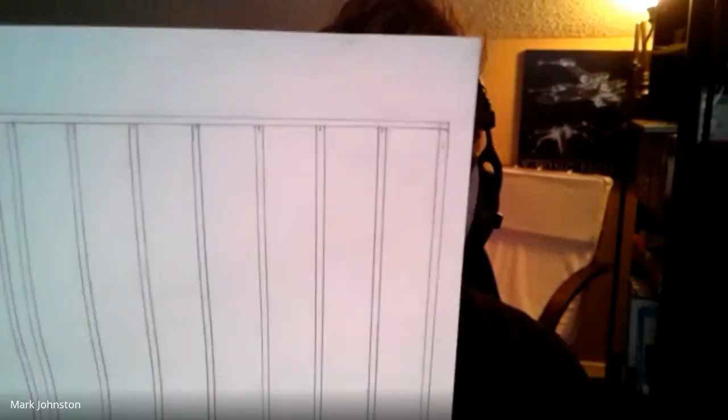We've drawn it to a 3/4 inch scale, meaning 3/4 of an inch equals 1 foot. The cool thing is 3/4 is also 12/16. Think about rulers having 16ths on them. Every 16th is 1 inch, so 12/16 is 1 foot. So 3/4 of an inch equals 1 foot in our scale. That's the scale we're using.

So we've done a wall, a regular wall with just a wall. Then we did a wall with a door in it, something we'll need in order to get into our shed.

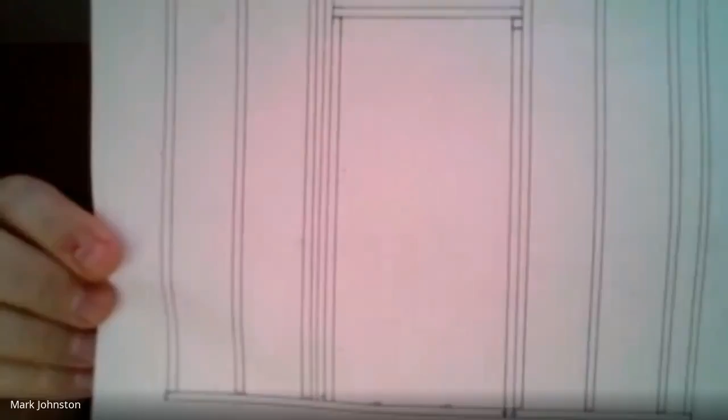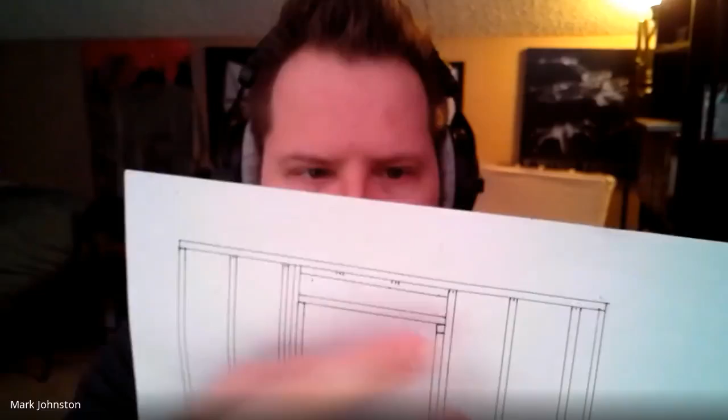We've learned some other definitions, like that's a header, and you've got trimmers right here. The way we did this one, we didn't end up getting any cripple studs up there, so we just used another 2x4 to fill that gap at the top. It really just depends upon how your shed is going to be built and how you've designed it. That determines things like the height of certain elements. I'm pretty sure door heights are standard, but you could have doors that are higher or lower depending on the materials you use.

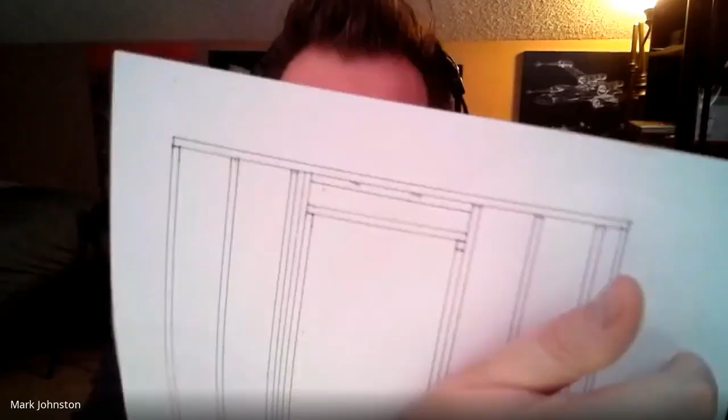So anyway, that was that. Notice that the studs on these are each 16 inches on center. That's a standard in construction, to put studs in a wall 16 inches apart, measured from the center of one to the center of the other. That's actually kind of cool, because 16/16 is 1 inch in our scale, so we just use the inch marker at each spot where the studs go.

And then we also wanted a window for our shed. So there we go — we have the header for the window, a sill for the window, and those trimmers. And then there's a cripple stud right there.

So I'm using these plans, and I did make a mistake early on when we started this, in the height of the wall. We're going to find out together as we go through this. This is probably going to be the first of 3 or 4 videos. We'll find out why that mistake was a big deal, how we'd deal with it if we were out on the construction site doing it this way, and how we might do it better in the future so you can avoid that kind of mistake too.

So I'm going to use an online tool called Tinkercad. You've probably heard of it before, especially if this is your second year with me — you've probably used Tinkercad last year. I'm going to show you what I've been working on on my own.

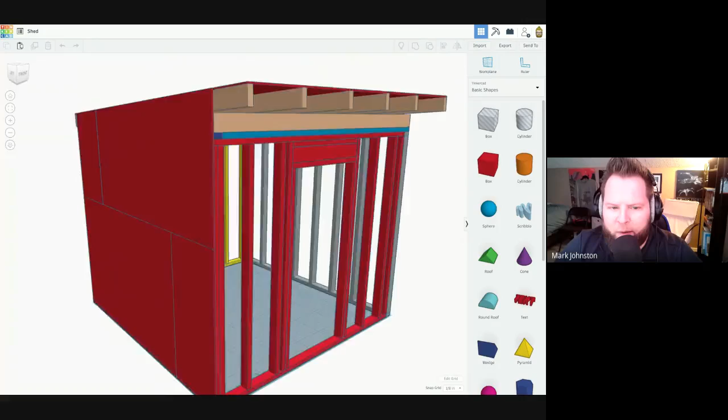I hope you guys can see that okay. But I basically put my shed together, and I even put a roof on it. I even started putting some decking and sheathing on it. But you can see there, this is completely to scale — it's exactly the size of the scale that we did in the drawing.

Watch, I'll select this sole plate right here, and I'll select this little dot here. Look at 7.5, which in our scale, 7.5 inches equals 10 feet.

A 10-foot 2x4 is a standard size of lumber you can buy. You could go to Home Depot or Lowe's right now and buy a 2x4 by 10 from them.

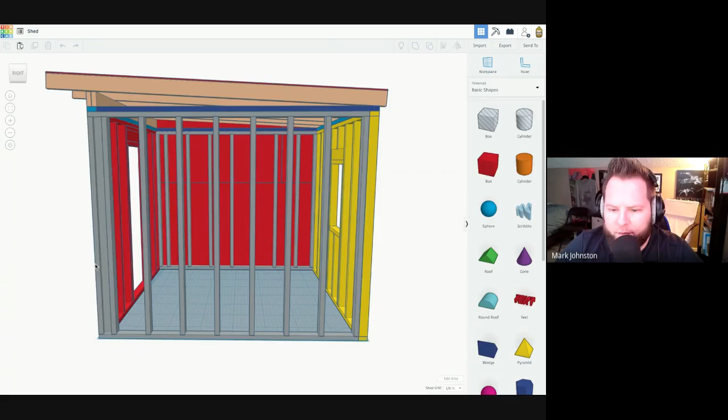It's important to mention that lumber mills cut a quarter inch off the nominal size. Theoretically, they cut the lumber to 2 inches by 4 inches as a rough cut, then they plane it, sand it, and cut off imperfections, taking a quarter inch off each side, which totals a half inch. So a 2 by 4 is not actually 2 inches by 4 inches—it's actually 1.5 by 3.5.

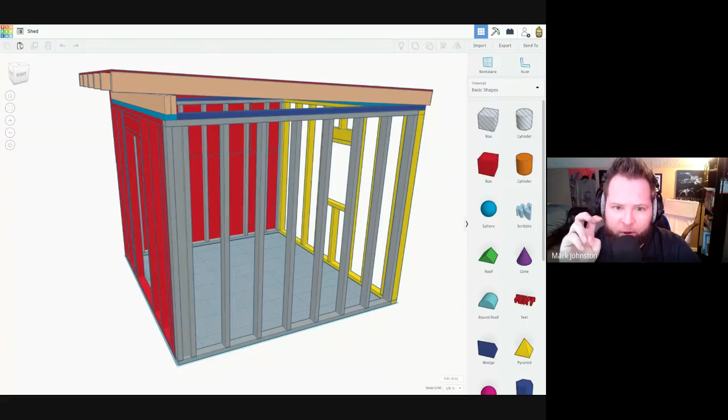That's a little weird, but it's just the way it is. For the purposes of measurement and putting it in the computer, we're going to use the nominal size of 2 inches by 4 inches. If somebody was curious about your project, you could tell them the teacher said we were going to use full-size lumber measurements. In some places in the country you might find a lumber retailer that could get you full-size lumber, 2 inches by 4 inches.

But I've never seen it. They used to do that a long time ago.

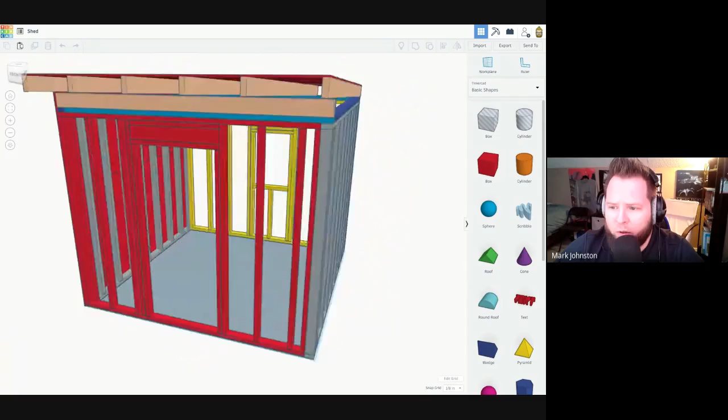So let's get started. What you want to do is go to tinkercad.com and sign up. If you're 13 or older, you can sign up for your own account.

You don't need a classroom account or anything like that. Most of you guys, all my students, are all 13 or older, so you should be all set to go. Create your own account, and then you can use this again in the future for all different kinds of other projects. Notice I was having some fun here with Halloween a few days ago, and I do other projects in here too. But this is my school account—I also have my own personal account where I have some personal projects I work on.

You're going to want to click Create New Design. Okay, and you'll notice the work plane comes up. In the lower right-hand corner, you're going to see a couple of little options—one's called Edit Grid and one's called Snap Grid. We're going to click Edit Grid and change the units to inches.

Now, I could do this in millimeters and make it so every millimeter equals an inch—I could do a scale like that. But since we're copying what we did on paper into the computer, we're going to use real measurements that we actually did on paper. So I'm going to change units to inches, and under presets I'm just going to use default. Update grid, and there we go.

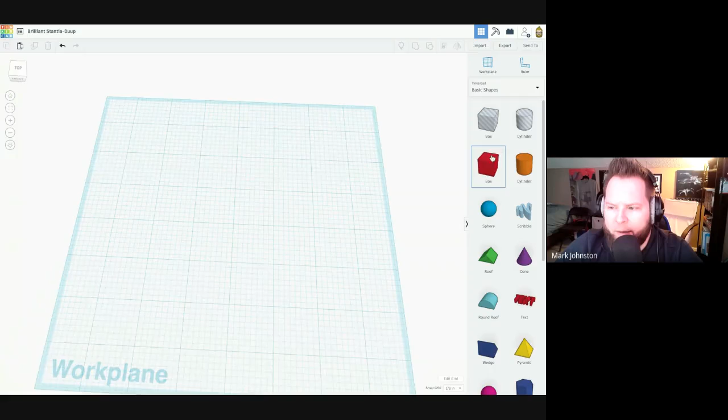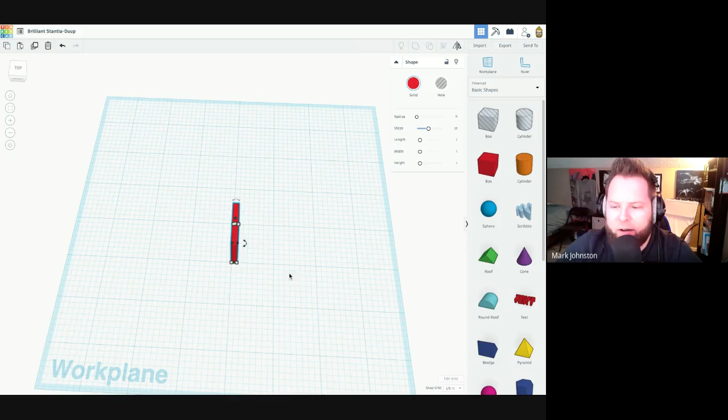Now, looking at the grid, each one of those big squares is an inch. You'll count 1, 2, 3, 4, 5, 6—there are 8 of the little squares, which is kind of weird, but that's just 1/8 of an inch. So they're in eighths. So it's actually not weird at all.

Notice down here we have snap. The snap grid is set at 1/8. What that does—here I'm going to go to a top view, and I'm just going to click and move it, and you'll notice it's snapping every one of those blocks. Sometimes if it won't go where you want it to go, or it's snapping past where you want it to go, you might need to come down here and adjust the snap grid.

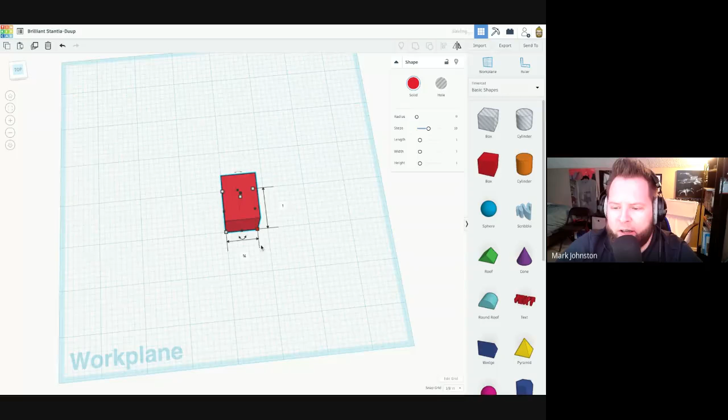All right, so 1/8 of an inch in our scale, because remember, 3/4 of an inch is 1 foot. So a 1/16 would be 1 inch. So 1/8 of an inch would actually be 2 inches. I know that might be confusing, okay?

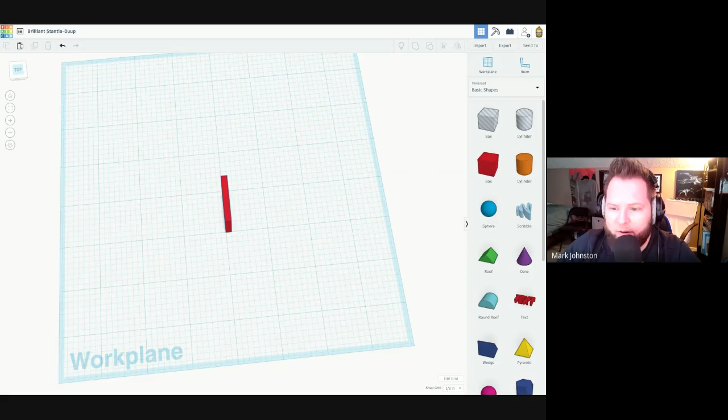But this has to do with scale, right? If I were to draw something to scale, it means that every part of it has been reduced down. Think about scale factor in math class—every part of it is going to be reduced or increased by that amount, through multiplication or division. And so in this case, our 10-foot shed is going to end up being 7.5—actually a little bit bigger, and you'll see why—7.5 inches, because each 16th of an inch represents one actual inch.

Okay, enough about the scale. Let's talk about Tinkercad a little bit more now.

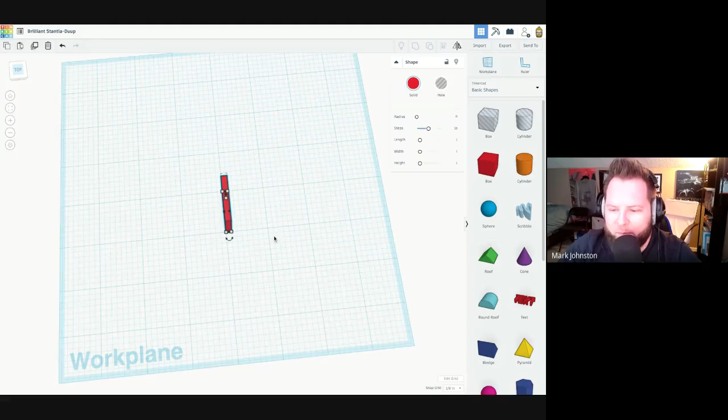Notice there are a couple different views here. I can hold down the right mouse button and click and drag. If you're using a Chromebook, you can click and drag this little block as well, or click with both fingers and drag around the work plane. This is going to be what works best for you. If you don't have a mouse, you can still do it—you'll be okay. But if you do have a mouse hanging around, I'd use it, because it's going to be a lot easier to do Tinkercad with a mouse.

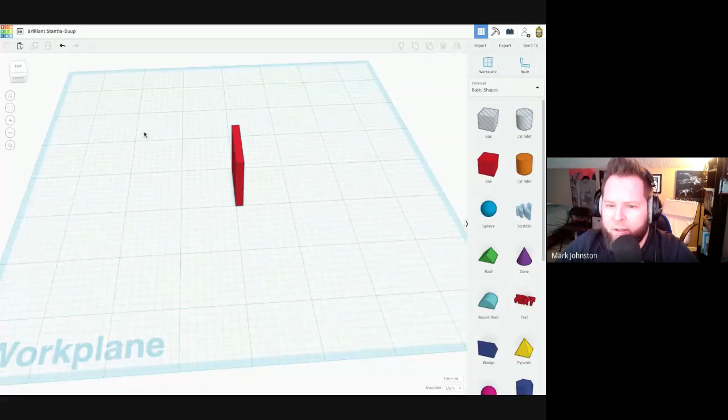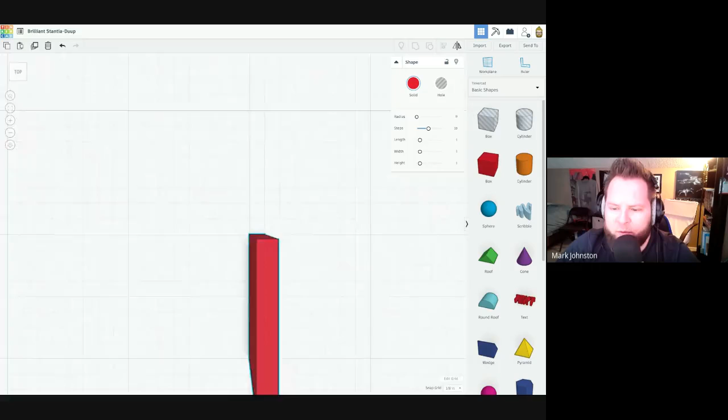Now notice when I'm looking top down, this is a 1-inch block right here, yet it's obviously going past the 1-inch marker. That's because I'm looking at it with a perspective view. It's like as if I was floating in space above it and moving around it—I'd have this different look, this different view of it as I flew over it.

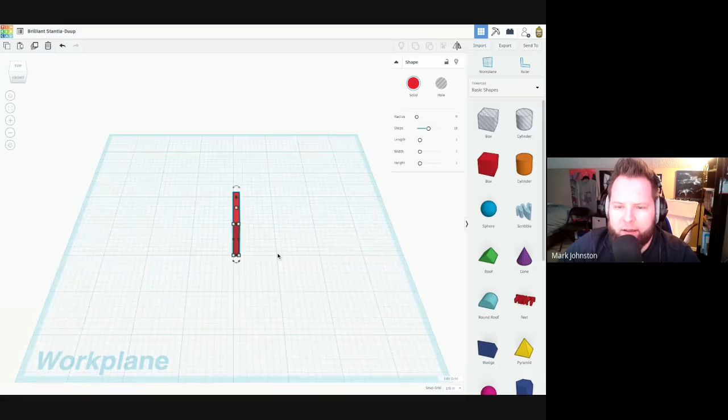For our purposes, you're probably going to want to switch to orthographic view. That's this button over here on the left. You've got the home button, which will bring you back in case you get lost—let's say you're way off here and need to get back, click on the home button and it takes you back here. You can do plus and minus to zoom in and out, or use the scroll wheel on your mouse, or two-finger scroll to zoom in and out.

Then we want to change it to orthographic, so I'm going to click that. Now notice when I look at it from the top view, it doesn't change the way it looks—doesn't matter where I have it positioned, I'm looking down on it and it will always appear that way. This is not a perspective view, not the way my eye would see it in reality. This is for the purposes of working on it and making sure all the dimensions look proportionate to each other.

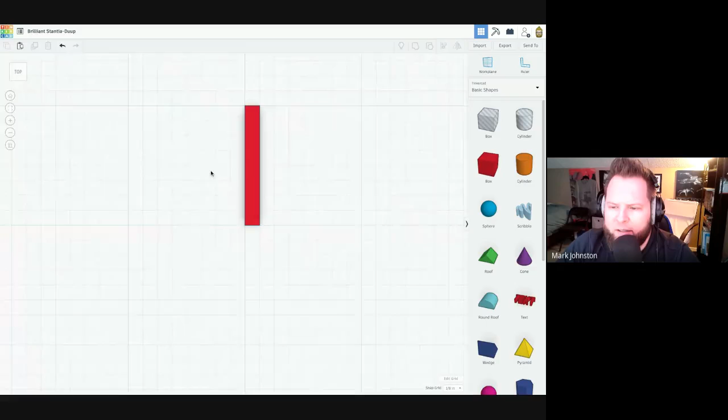All right, so let's get started. I'm going to use this little piece I put there—no, let me get a new one, that way you can do this along with me. So just grab yourself a box. I just clicked once, and you don't have to hold—you can move your mouse around to put it where you want it, and I'll click again, and now I have a 1-inch by 1-inch by 1-inch box on my work plane.

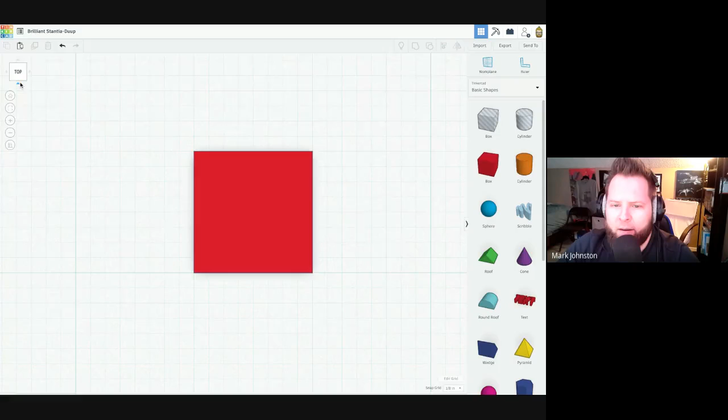And if I look at it from the side, notice I'm clicking these little arrows, and I'm seeing the different sides of it—it looks the same everywhere I am.

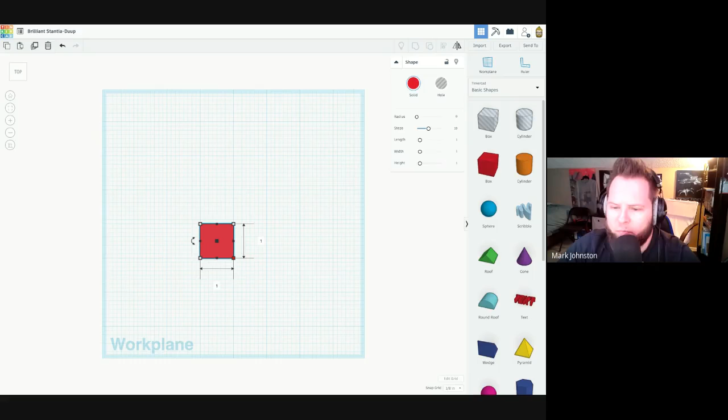Okay, I'm going to look at it from the top view for right now, and let's get a couple of our dimensions straightened out. Notice I just click on the box, then click on the little white block in the lower right, or any of the corners, and then I can change the dimension right here. Now I have to put in decimals—it doesn't let me put in fractions, but you could do the math if you wanted to figure out a fraction. Fortunately, we're using 10-foot lumber to begin with, and we've already figured out that that's 7.5. The decimal for 7.5 is pretty easy—7.5.

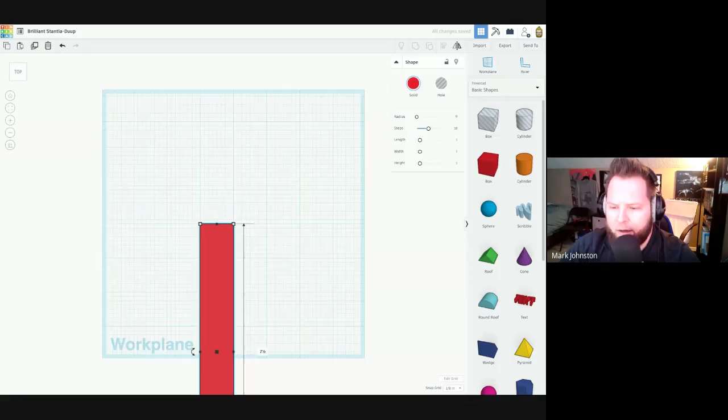Okay, and then I can click and drag and move it up a little bit, so now it's 10 feet that way. And if it's going to be a 2x4, and I'm going to lay it down, then it's going to be 4 inches wide at the bottom. If each inch is a 16th, then that is 4/16, or a 1/4 of an inch, right?

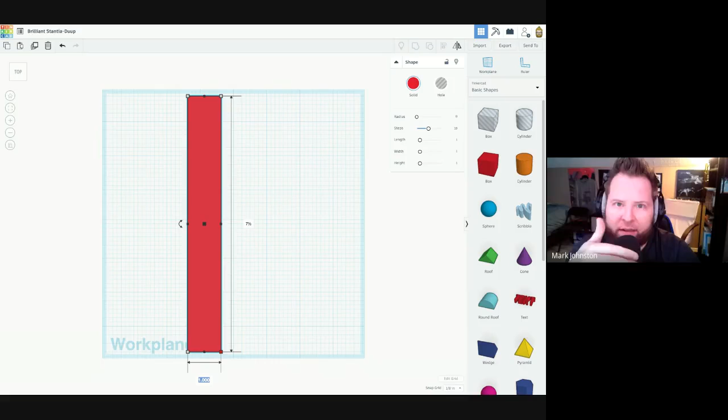4/16 reduces down. You can reduce the top by 2 and the bottom by 2. That would be 2/8. And then you can reduce again, and it would be 1/4. So 1/4 is also a pretty easy decimal to figure out. It's 0.25. Just think about money, right? 25 cents is a quarter of a dollar. So 1/4. All right, we've got those two dimensions taken care of.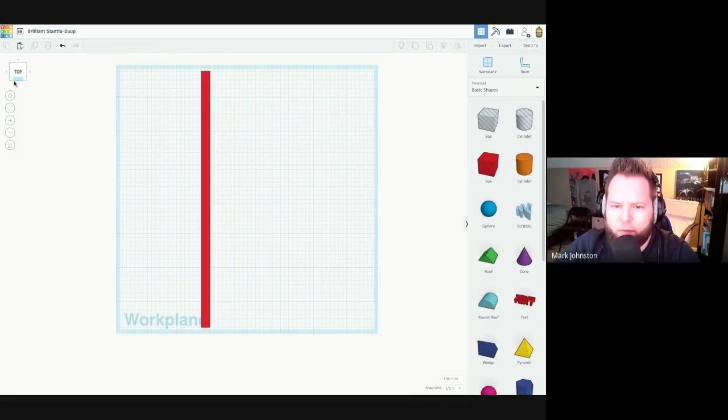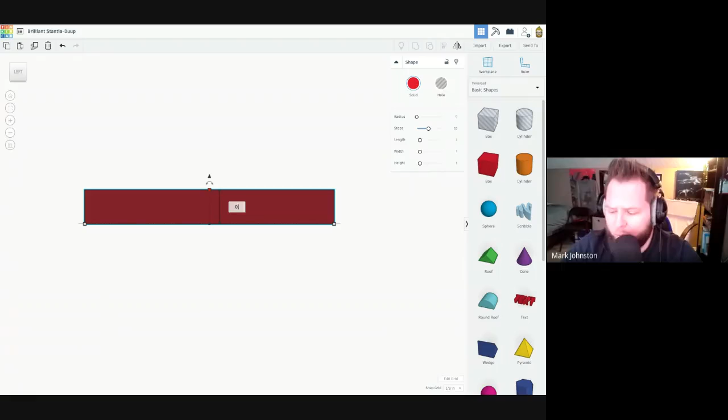Now I need to change my view. I'm going to switch it like that. I'm going to click once, and then the height is a little bit different, so you've got to click on this box right here. And now the height is going to be less than 0.25. 0.25 was 4 inches, so we need half of that. I know it's hard to figure out half of 25 sometimes, but it's 12.5, so it's 0.125. And there you go.

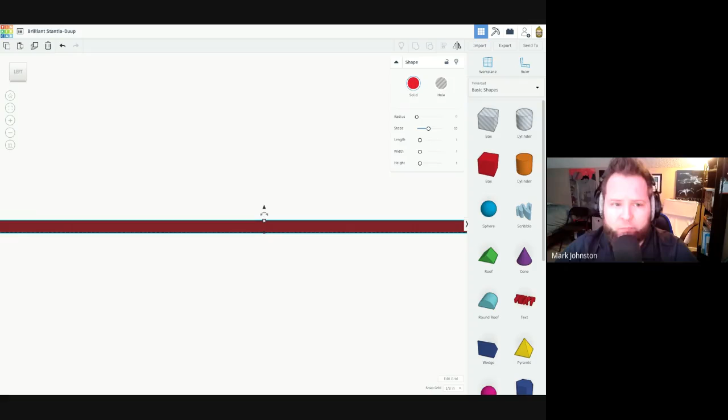Notice it changed it to a fraction. 0.125 is 1/8. If you work with this a lot, you'll get so much faster at conversions for fractions and decimals, and have a much better sense of numbers. And it makes sense, because you'd say, oh, well, 1/8 is 0.125. 0.125 times 2 is 0.25, and so that's a quarter. And so 2/8 is 1/4, and you can just start figuring it out in your head without any kind of memorization.

It's just because it's stuff you use all the time. So the more you use math things in what you're doing in life, the better you'll be with it. The more fluid, the more fluent you will be at speaking when it comes to numbers. You can use a calculator if you need to for any of the stuff we're doing, but I'm thinking I should be able to show you some tricks and how you can figure it out on your own.

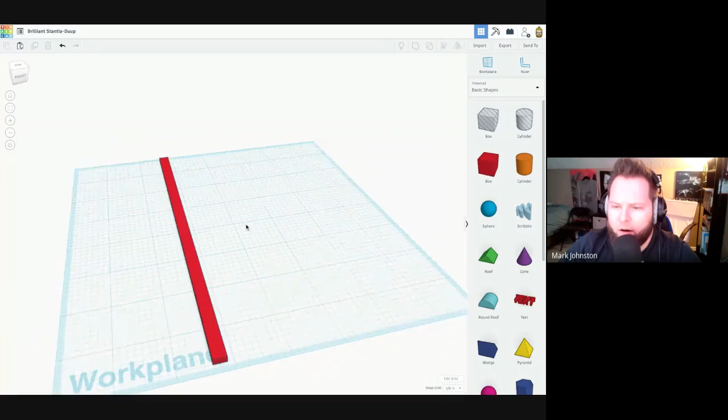All right, let's zoom out to the home view. Click that. Oh, I clicked the wrong button. There we go, there we go. All right, so there we go. We've got our 2x4. That's a 10-footer right there. Pretty cool.

Now I need to make a few more of these. So what I'm going to do is I'm going to click on it, and then I'm going to click this duplicate button up here, or you can push Control D. Now, when I duplicated it, now there's two. You can't see the other one, it's right on top of it.

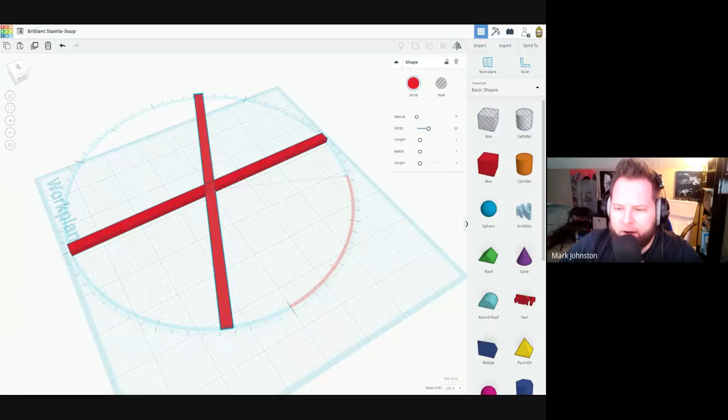So I'm going to use this little spin tool thing right here, and I'm going to turn it. And you know what, actually I didn't want to do that, so I'm going to undo. I actually want to turn this one right here. Notice I clicked on it once, and then I get this little box. I want to turn it 90 degrees, so I'm going to type in 90 and push Enter. I'll click somewhere else, and notice now I have that 2x4 right there.

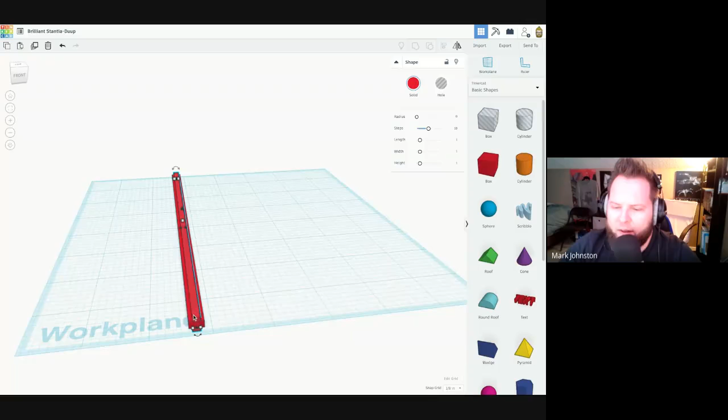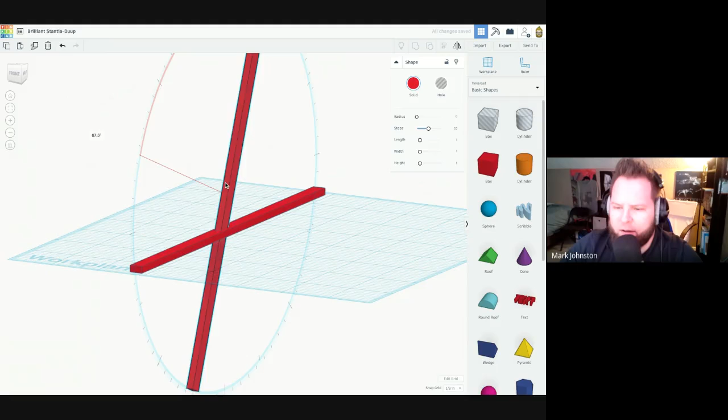Now, if I want to change the, whoops. There we go. Okay, so if I want to change the height of it, I click this little cone, and I can pull it up. There we go, yep, I'll select it again. I'm going to change this to 90. And it's going to be a little bit of a process, you can see. I'm going to change this one to 90 as well.

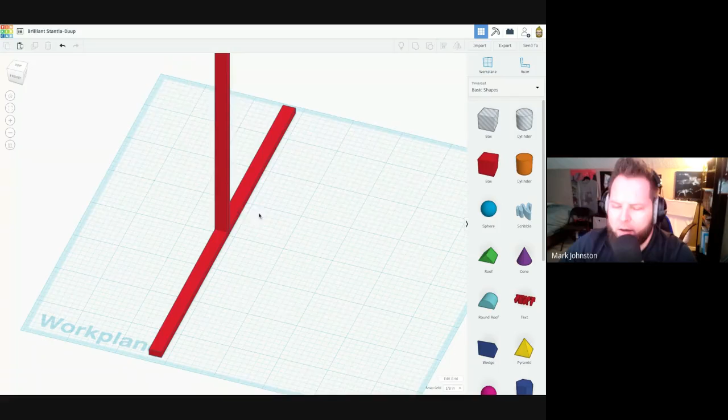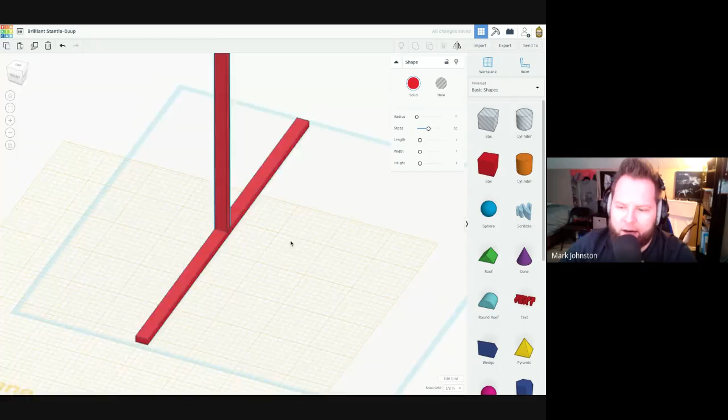Okay, and now I'm going to show you a trick. If you push D, it will go to the bottom of this work plane. If you know you're going to be working, here, I'll undo that. If you know you're going to be working at a new plane, which we are, we're going to be putting studs on this to start framing the wall, you can actually drag a new work plane, and you can tell it you want that, the surface of that object right there, to be your new work plane. Just like that. Now when I select this one, if I push D, it actually goes to the edge of that work plane right there, just like that.

Okay, so now that is a 10-footer. I'm only going to use a 10-footer for my top and bottom plates.

For my studs, and this is where I kind of messed up, we'll figure this out more in a bit. But let's stick with my error. We're going to do 96-inch studs because 96 divided by 12 is 8. So these are 8-footers, 8-foot studs.

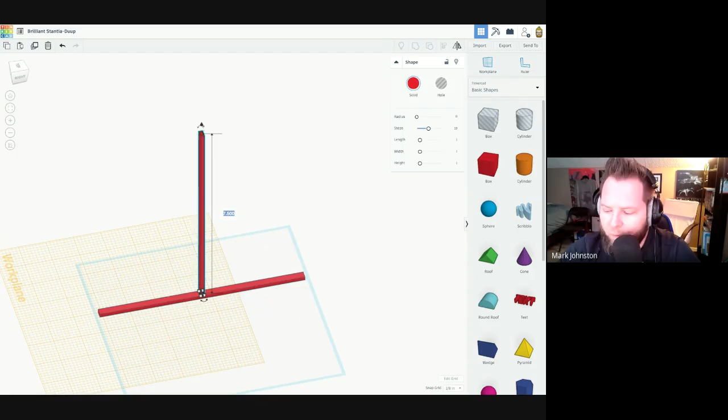If I wanted an 8-footer, if I take an 8-footer times 0.75, which is the 3/4 inch scale, it's going to be 6. So this is going to be 6 inches instead of 7.5. Okay, come on. So 6 inches right there. And it did it for me.

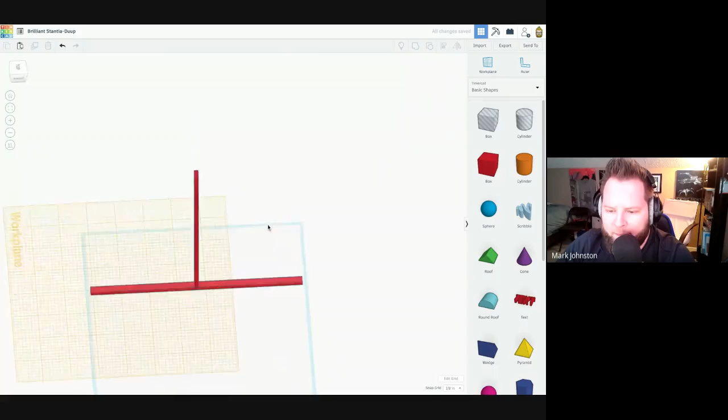I'm going to use the arrow keys also to make my life a little bit easier. Watch this. If I'm looking down at it, I can just push the arrow keys, make it go right where I want it to go. Looks like it's going off a little bit.

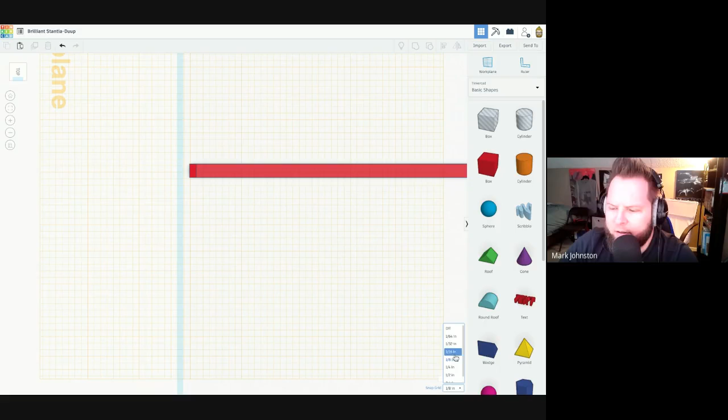So this is going to be a situation where I'm going to change the snap to a 16th, because what was happening is it's not lining up. See how it's hanging off the edge there? So I changed it to a 16th, and now when I use my arrow, it goes. And actually, I'm going to move them both there.

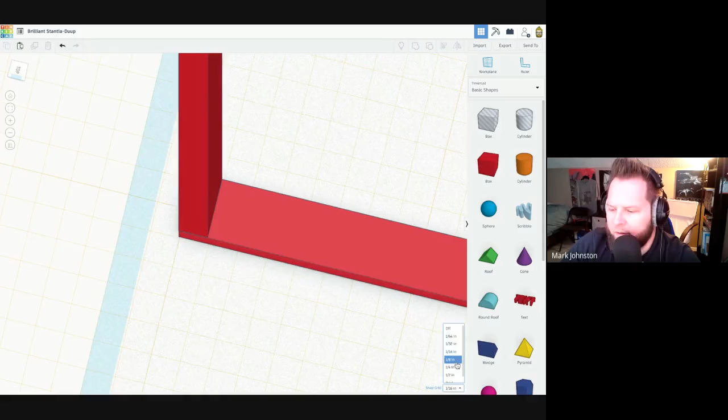Now I'm going to change this back to an 8th. I mean, the snap doesn't really matter too much. I'm going to put this work plane back right there.

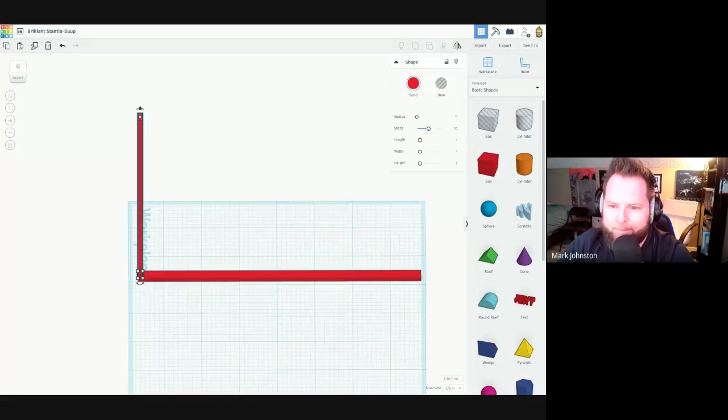So now I want to add studs every 16 inches on center, right? And so if I click duplicate, and now I'm going to go 1, 2, 3, 4, 5, 6, 7, 8, because we're doing 1/8 of an inch. So that's like going 8/8 right there. I just went 1 inch.

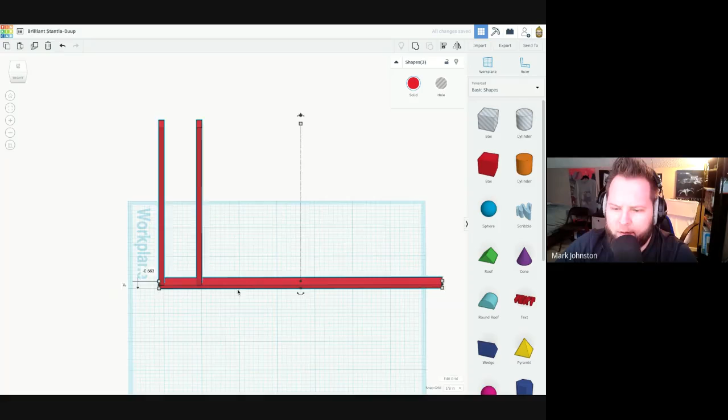Let me show you, if we line it up right there. Notice that the darker line is right there and the darker line is right there. That means we've got it lined up at the 16-inch mark. So 16 on center are those studs.

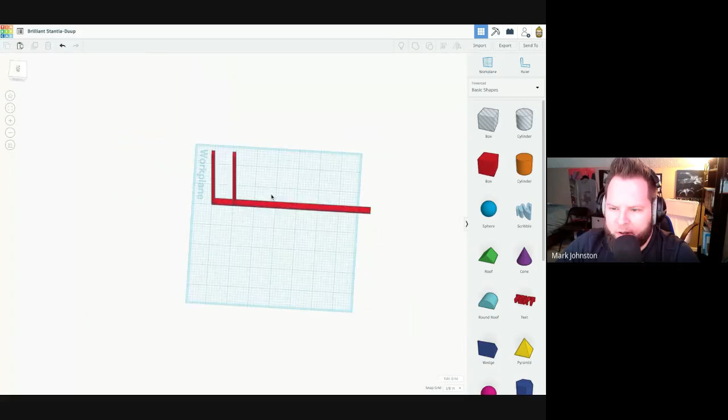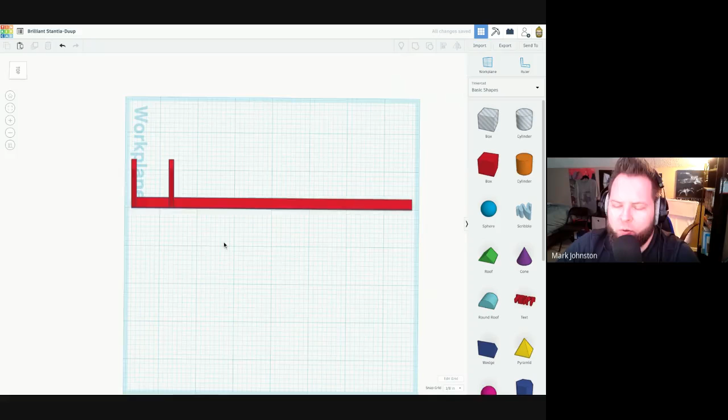Now, this is still just a very general class, guys. This is not a construction class. So technically, some folks would measure 16 inches from the edge of the first stud. Just know that there's different ways of doing this so that materials line up differently. But for our purposes, we're just going to do 16 on center from every stud.

I'm going to select this one and I'm going to click duplicate. 1, 2, 3, 4, 5, 6, 7, 8. Now check this out. If I hit duplicate again, it duplicates and does what I did to it. Watch. Duplicate. Boom. It put it where it's supposed to go. And I just keep clicking duplicate.

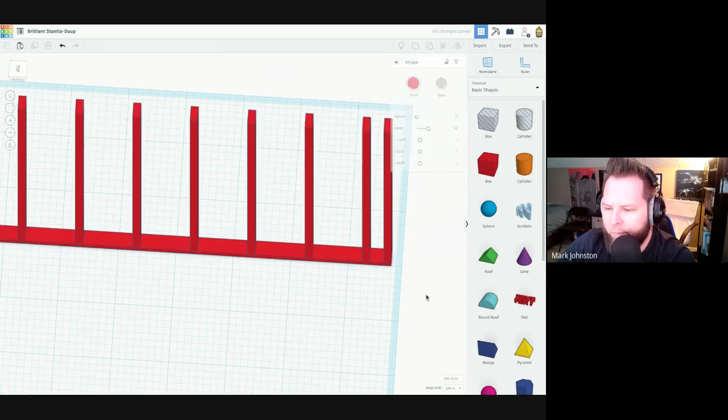Now, if I hit duplicate again, look what happens. That one goes way off over there. So I'll just need to grab this one, and use the arrow keys to bring it back to there. And that should look almost exactly like what our drawing ended up looking like. Remember, we ended up with 2 close together at the end, and that's okay.

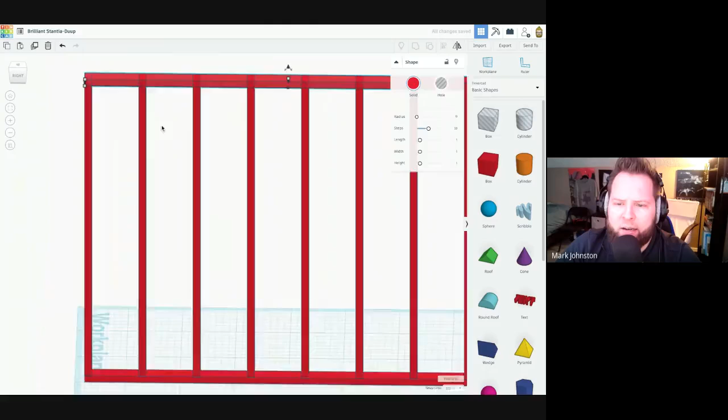Here at the bottom, I'm going to duplicate that bottom plate, and then I'm going to click and drag this little cone. Now, you don't want that. Okay, that is not right. So if that's what you see, then you need to go up till it gets to there.

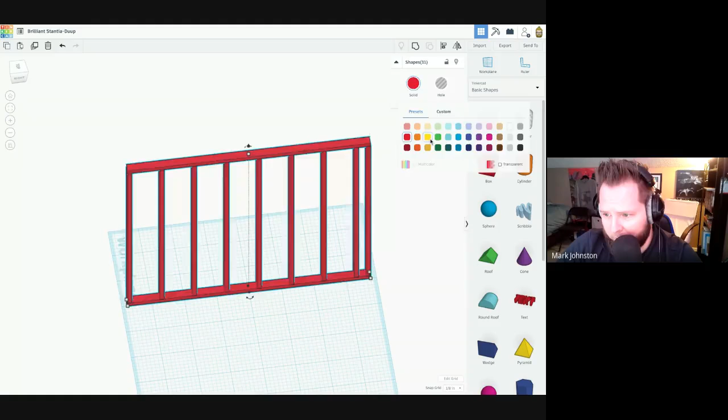Congratulations. If you were following along, you have framed a wall in Tinkercad. We're not going to join any of these together. I'm going to change the colors of each of the walls just to keep them kind of separate so that we know which is which, what's going on.

And so I'm just going to move this guy off to here. Then in the next video, we'll start working on the second wall and then probably the door wall. And then we'll do the window wall in another video. All right, guys, if you have any questions, let me know. But that's pretty much how we're going to use Tinkercad to do a scale model of our shed. All right, so that's the end of the recording, and I'll see you in the next one.